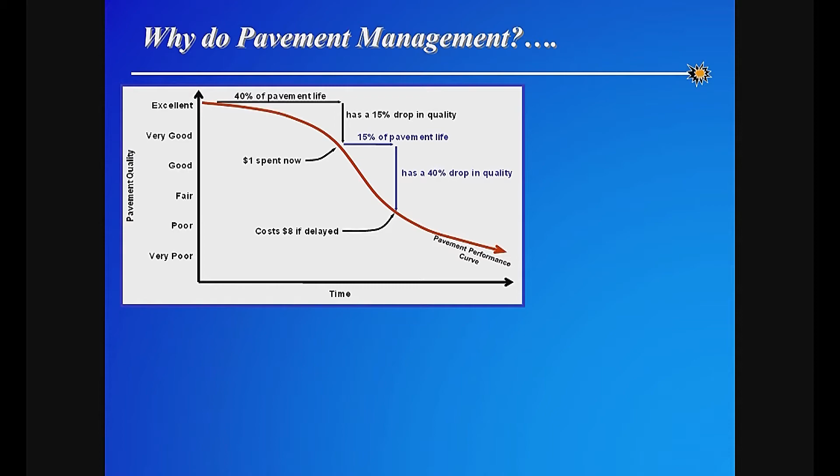So it's far more cost effective to maintain an asset in good condition and spend $1 now than it is to let it deteriorate and rebuild it later and spend $8 later. Streets are very similar to the cars that we drive on an annual basis. We buy a car, we change the oil, and do routine maintenance in an effort to maximize the life of the vehicle. So we change the oil every 3,000 miles, or we can swap the engine every 30,000 -- far more cost effective to do the maintenance on the asset.

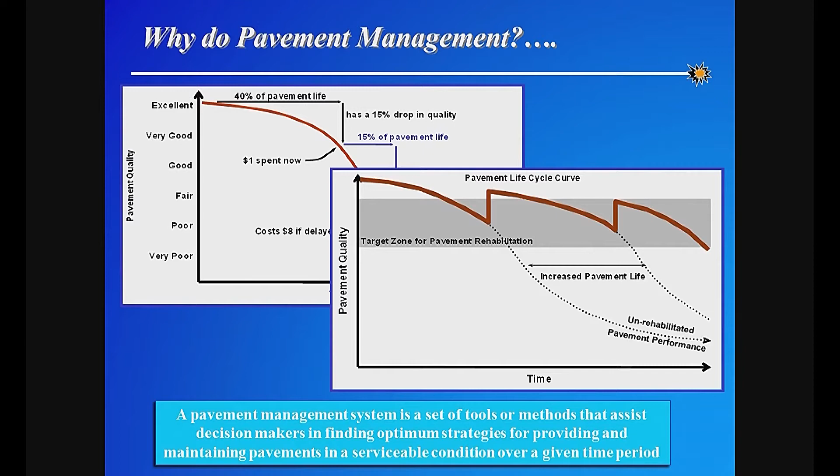There's a right time and place to do rehabs, and we certainly want to target roads before they drop off that cliff, so to speak. So that target rehabs zone I'm showing in that second graph is a PCI range of about a 60 up to an 85. Pavement management is really a balance of tackling the backlog -- the roads that are in bad condition -- while also maintaining the roads that are in good condition, which represent the fabric of the city's road network.

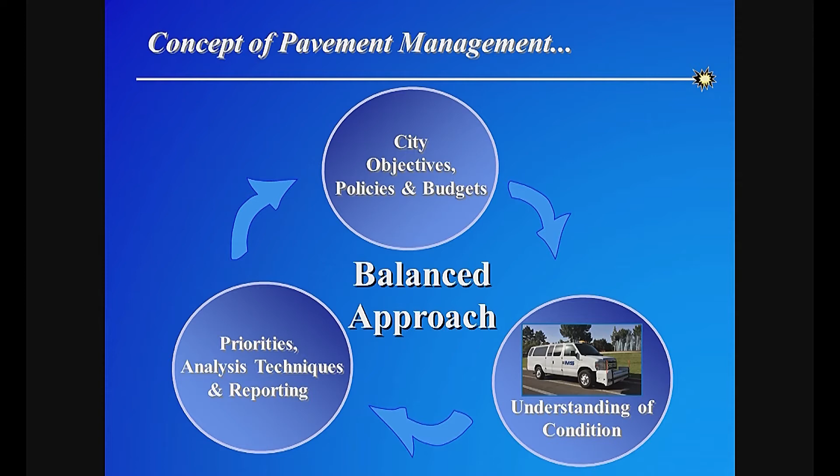Now, the concept of pavement management is really built around three specific ingredients. The first is the network condition -- understanding the network condition. We can't plan a course forward until we know where we are today. It's rolling in city-specific priorities, industry standard analysis techniques, and city-specific reporting methodologies. But we also want to roll in a third ingredient, which is city-specific objectives, level of service policies, and certainly existing budgets that the city has planned moving forward.

So some tools that we use to rate the streets: this is the laser road surface tester that was mobilized to the city. Its job was to survey every segment of road maintained by the city. It has a series of high-speed lasers, HD cameras, and GPS technology. So it drove every segment of road, assessing the cracking, the rutting, the roughness, the shattered slabs, the potholes -- you name it. It was gathering a full suite of pavement distress data that we could then analyze.

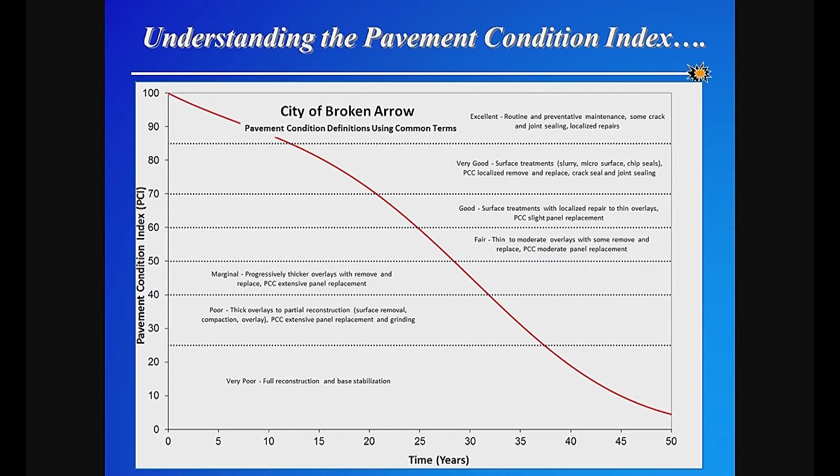If we jump further down the list to the poor roads, these land between a PCI of 25 and upwards of 40. On asphalt roads, these require a thick overlay or partial reconstruction for rehab. On concrete roads, they need something more extensive in terms of panel replacement, meaning 15% or more of the panels along the route need to be replaced.

So there's a right time to apply a rehab to any given road based on its condition. We've talked about PCI - here's what PCI looks like.

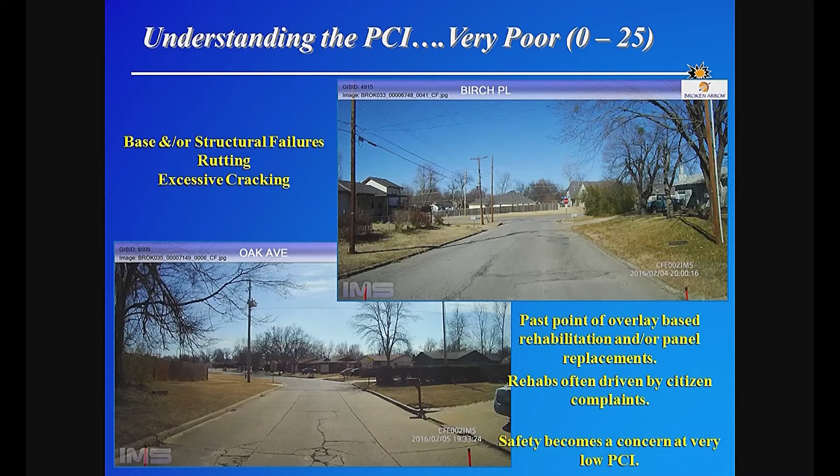Rehabs on these roads are often driven by citizen complaints as well. Safety becomes a concern at a very low PCI. As soon as PCI drops below 10, that's where we start seeing distortions forming in the road and potholes forming on a regular basis.

These are a high priority to avoid reconstruction. We can save dollars today by capturing critical poor to marginal roads rather than letting them fall into a full reconstruction rehab process.

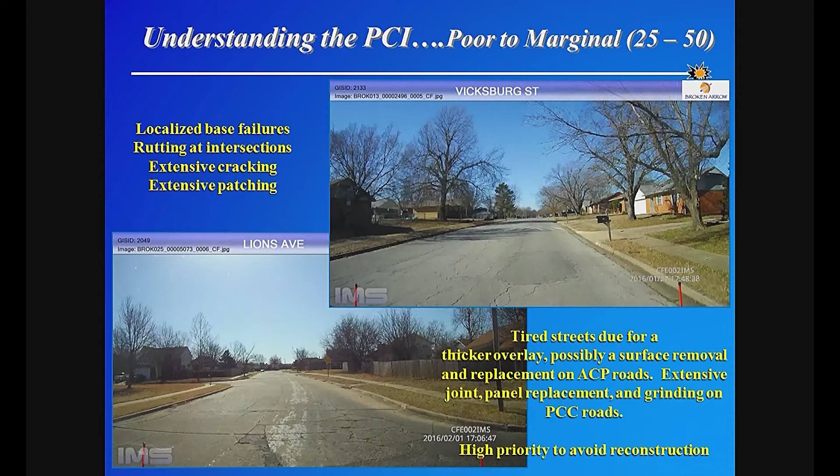If we look at the fair roads, between a PCI of 50 and 60, these have progressive cracking but fewer base failures and certainly localized distresses. These roads are at optimum timing for a thin to moderate overlay or even a moderate panel replacement on concrete routes.

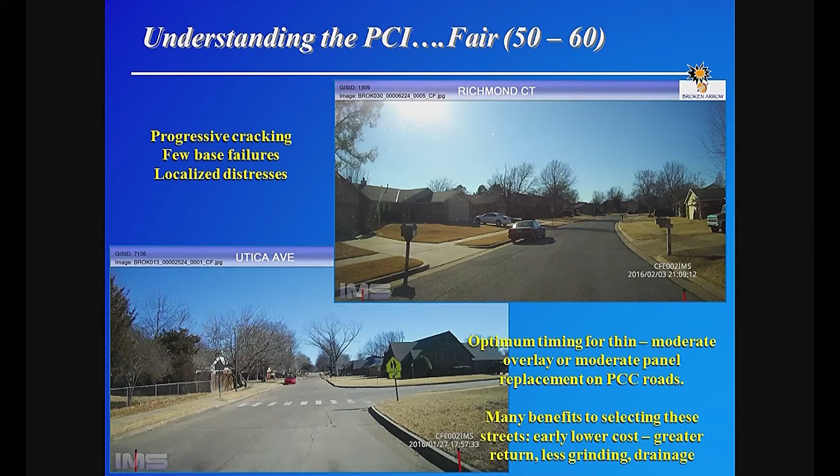There's a lot of benefit to selecting these routes, as there's an early lower cost from using thinner strategies and less materials. There's a greater return that results in less grinding to the streets and less work to be done on the drainage.

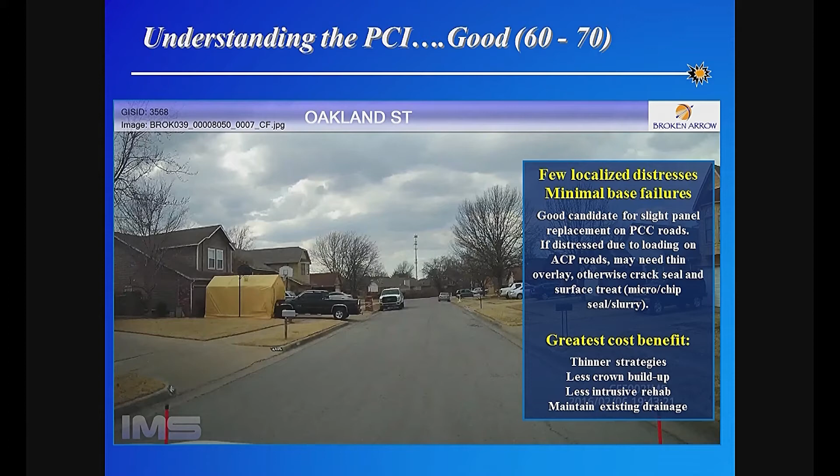Now, if we notice a road in this category on an asphalt road exhibiting load-associated distresses - things like alligator cracking, rutting, and potholes caused by traffic loading - if that's the case, we apply a heavier rehab, such as a thin overlay, as opposed to a surface treatment.

The very good roads score between 70 and 85, with very few distresses, no rutting, no base failures. These roads are good candidates for some crack seal and a surface treatment on asphalt roads.

And certainly a joint reseal and localized rehab on concrete routes. These roads maintain the existing drainage when we apply these rehabs, and they extend the pavement life at the lowest cost - they have the highest cost benefit.

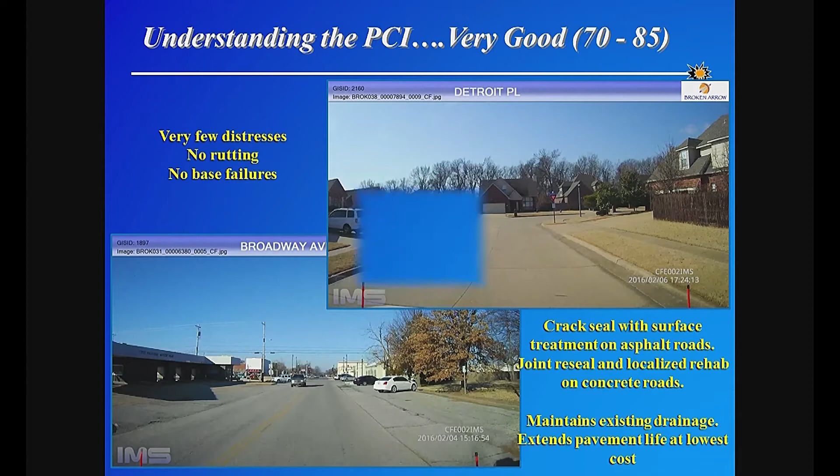The excellent roads score between 85 and 100. They're in like-new condition with very few minor distresses, smooth ride, and good drainage. These roads should provide a solid 5 to 10 years prior to the first rehabilitation with some routine maintenance.

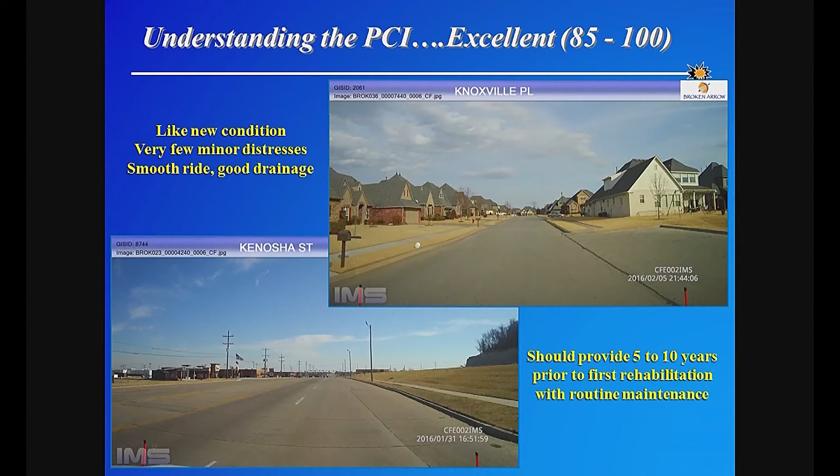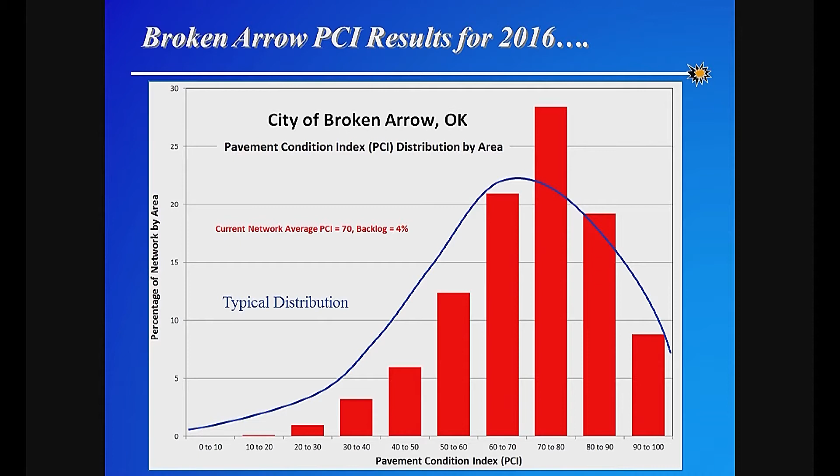Now we take this same graph and group the PCI scores into descriptive terms - the very same terms we just reviewed in some of the imagery, from very poor to excellent. There are 3 metrics we use to assess the health of any given agency.

The first metric is the average PCI score. Nationally right now we're seeing an average score between 60 and 65. Broken Arrow is scoring a 70, which is a highly coveted score. A lot of agencies are struggling to get into the 70s, and it's a highly desirable place to be. So you're doing well there, and you get a check mark on the first metric.

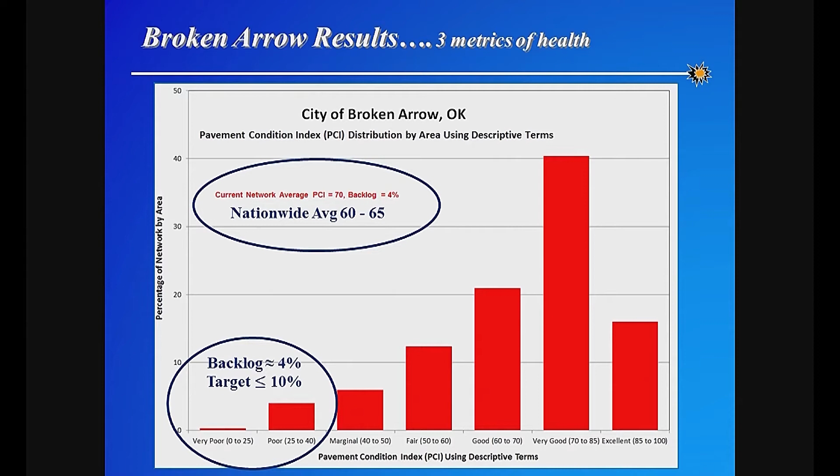The second metric is backlog. Your backlog is at 4%, and as I mentioned earlier, that's a phenomenal, excellent number. A very financially healthy city will have less than 10% of their network fall into backlog. 12 to 15% is considered manageable so long as we check backlog and arrest growth. As an agency approaches 20% backlog, things can spiral and snowball out of control quickly, meaning the big ticket expensive work piles up so fast we can't get our hands on enough capital to catch up. Broken Arrow is nowhere close to that number - you're in a very healthy position.

The third metric we look at is the percent of excellent roads - those scoring above a PCI of 85. Generally we like to see a minimum of 15%, and Broken Arrow met that metric as well, right at 15%. This is a metric because it tells us if the city has been reinvesting in the network close to the steady state requirement - simply the funds needed to maintain the status quo, the existing condition of the road network.

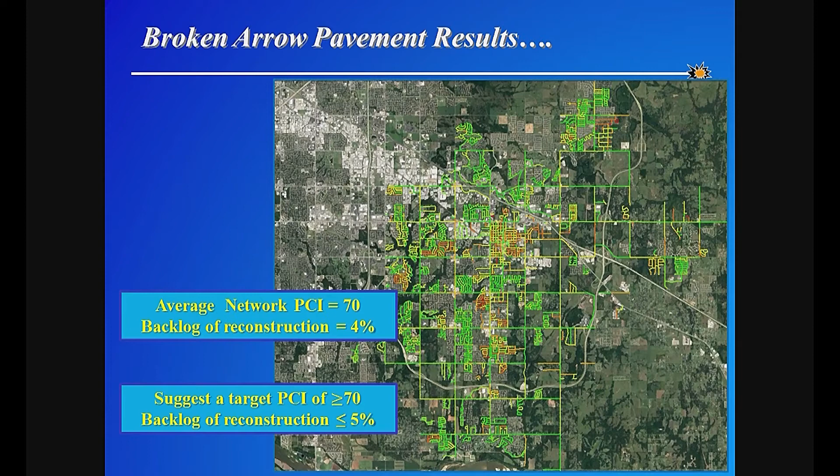This next slide shows a graphical plot of the road conditions. Green is good, red is bad, yellow is somewhere in between - organized like a stoplight. There's a lot of green up there. Again, network PCI is 70, backlog 4%. We would certainly suggest a target PCI greater than or equal to 70 - you're in a great position, let's hold that or improve. And we'd suggest a backlog of reconstruction less than or equal to 5%.

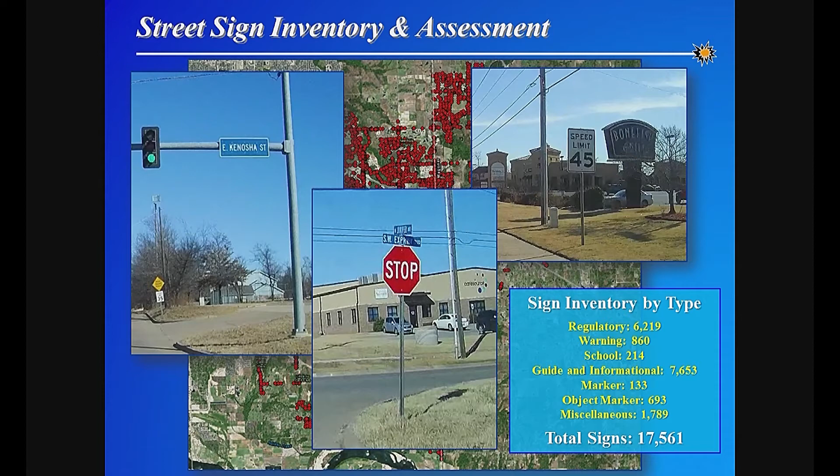We also did a street sign inventory for you folks. The van was equipped with HD imagery that we used to post-process and inventory all of your street signs as part of this assignment. Every red dot on that image is a sign you folks own and maintain - there are different types: stop signs, street signs, yield signs, bus parking signs, and more. In total, we inventoried 17,500 signs the city maintains. So not only is the road network a big asset and investment, so were the signs in the right-of-way.

So let's talk about the analysis methodology we use. We have all of this condition data, we've taken a look at the PCI score, and now we need to analyze it and come up with a 5-year rehab plan. First, we understand funding is not $0, nor is it unlimited - if we had unlimited funds, pavement management would be very easy. We also understand the city places a value on its road network across all functional classes: arterial roads, collectors, and local roadways.

We want to identify the annual budget that maintains the current PCI as well as backlog. Those often are not the same number. We want to examine the effects of your current funding levels, and we certainly want to prevent deterioration in pavement quality.

A few notes on the budget numbers I'm going to show you: ADA compliance is not included, so ADA ramp repairs and sidewalk repairs are not in these estimates. There's no inflation in the estimates, and pavement management is priority-based, not worst-first. We don't simply line up the roads according to PCI and start at the bottom. That's like swapping the engine every 30,000 miles rather than doing the routine maintenance.

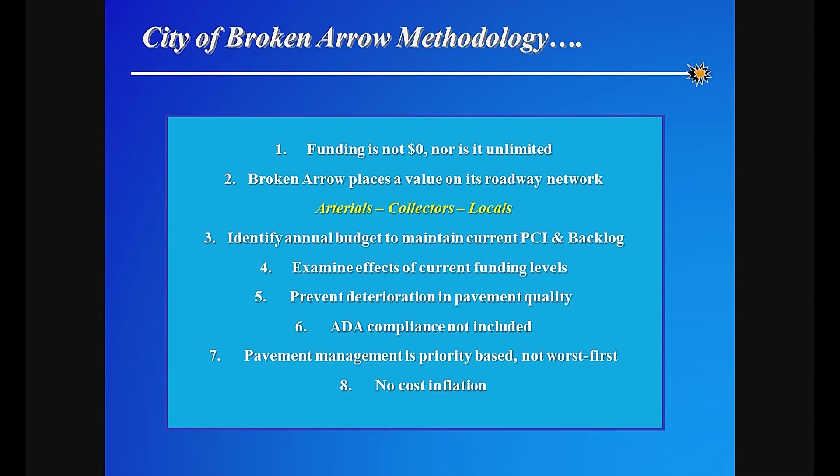The first thing we do before we jump into the analysis is a couple of life cycle estimates. These are fairly textbook estimates in our industry that are done well before we get into the analysis results. They're not the final numbers, but they help us validate and fine-tune the final numbers.

The first estimate is simply based on the network value. That $500 million is divided by each pavement type's theoretical life from new to dust. That gives us a number of roughly $9.5 million annually that needs to be spent on the network. This doesn't take into account condition, it simply takes into account the value of the network, so it's not a bulletproof number per se, but it starts setting the tone of what ballpark we need to be in.

The second estimate is based on the average condition of each pavement type. We apply an average treatment to the number of miles that fall in that category, and we come up with an estimated annual need of about $8.3 million. So we're starting to add a little bit more information to each life cycle estimate.

The last life cycle estimate before we get into the analysis is based on the city's total deficit, meaning if someone wrote the city a blank check to fix all roads in like-new condition, what would that number be? That number is just shy of $85 million to fix everything in like-new condition. Based on that, we can calculate an estimated annual need of about $6 million annually to maintain current conditions. So typical life cycle estimates show that we need roughly $6 million a year to maintain PCI.

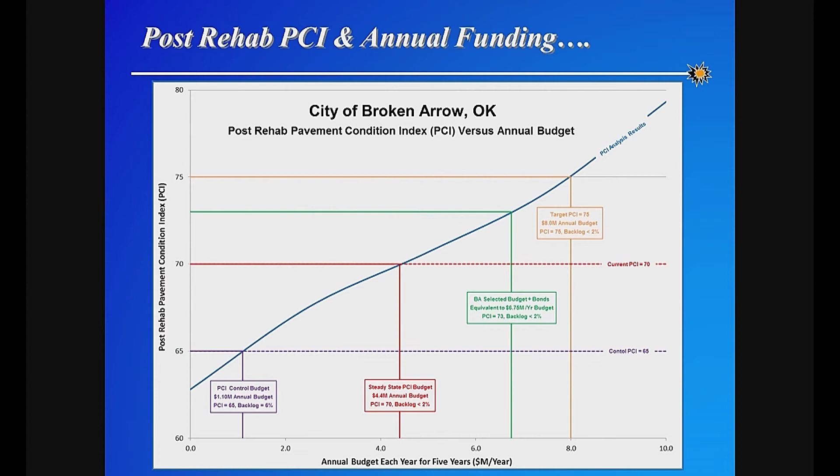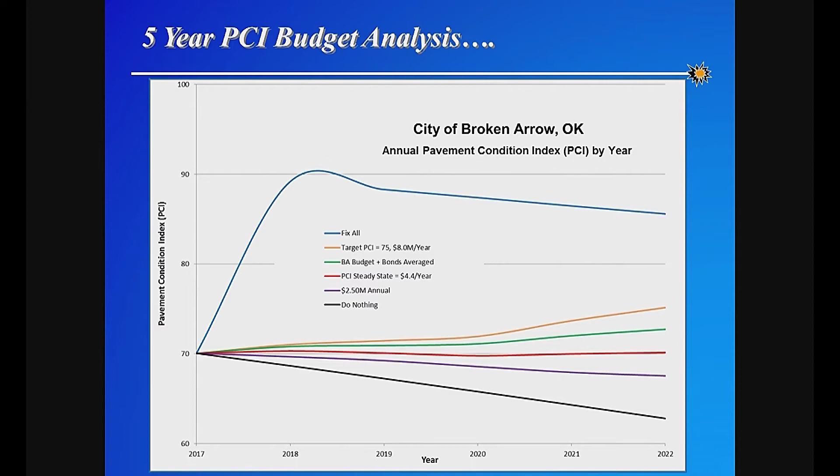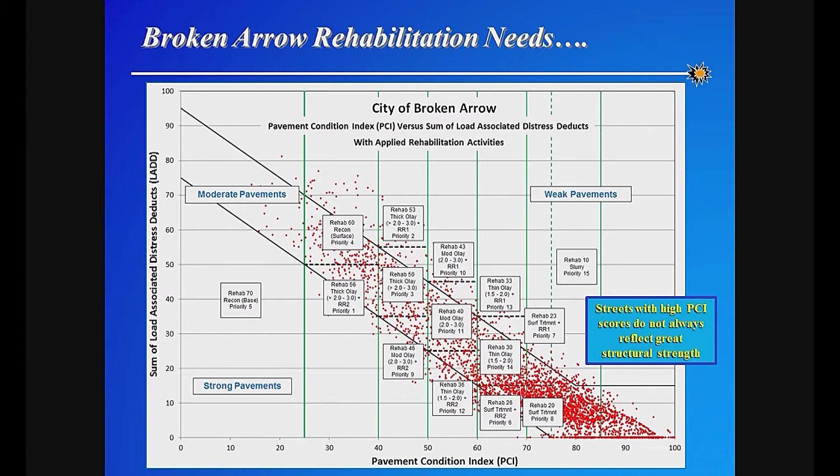Now, when we talk about rehab needs and selecting specific streets for rehab, how do we do that? This graph here is a little complicated looking, but I'm going to simplify it. What we've done is plotted PCI on the x-axis, and every red dot represents a segment of road surveyed here in Broken Arrow.

Every box represents a rehab activity that can be done to each road based on its current condition. In terms of prioritization, the arterials have the highest priority, followed by the collectors, and then the locals. That's fairly textbook pavement management.

But the order of rehab selection is based on the cost of deferral. For example, if a street requiring a thick overlay is deferred, the incremental cost is about 100% because it drops into a partial reconstruction category. The cost is exponential. But if a street slips from a thin overlay to a moderate overlay, the penalty is only about 25%. So when we're working with limited funds, we want to optimize the rehab plan as much as possible using a cost-benefit approach.

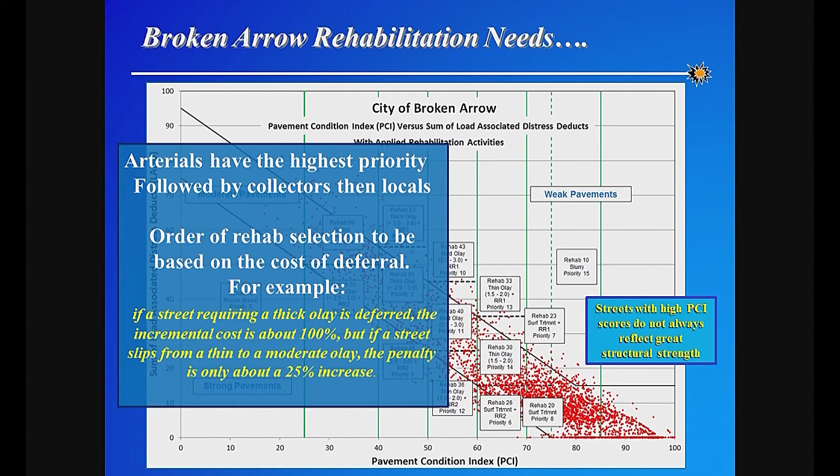In terms of some final recommendations, we would certainly recommend the city maintain the PCI at or above a 70, with backlog below 5% for the entire roadway network. Using a budget of $6.75 million, which takes into account the committed bond work, will result in a network PCI of 73 and backlog under 2% over the next 5 years.

We'd certainly recommend the use of a full suite of rehab strategies that are reviewed on an annual basis. Costs can change dramatically in materials, so those need to be updated annually. Steady, effective rehab and maintenance on an annual basis does save the city money over deferred maintenance in the long run. And certainly the city should resurvey their streets every few years to update the condition data, the rehab program, and the models run within the pavement management system.

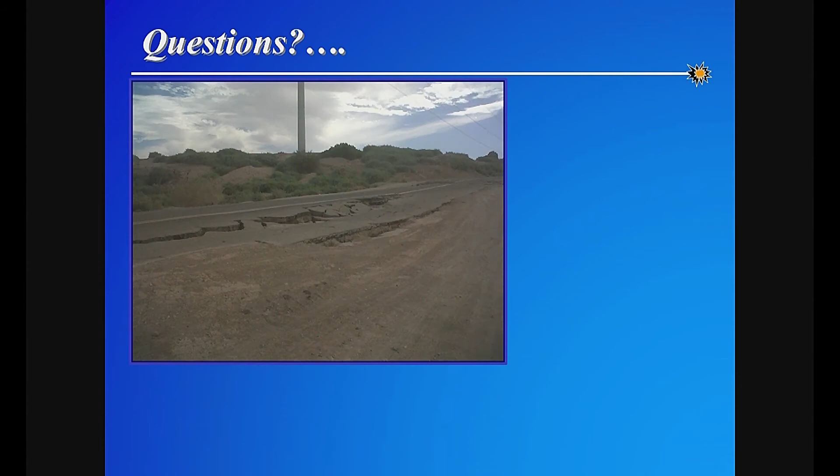And with that, I'll open it up to any questions. Those are not Broken Arrow roads, by the way.